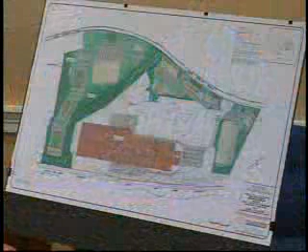The green shaded area submitted on the master plan with the application depicts an area of 45.5 acres of land. Of that land area, 37.5 acres consists of acceptable land, and the requirement to satisfy the density is 36.7. So we exceed the area requirement based on that green shaded area by just under an acre.

Just to explain what that represented, it was depicted in, I think, the last note of the plan as well. Chad, hang on one second, I think we may have a question for you. Just curious, what green shaded area are you talking about? The entire green shaded on that? Not this map? Your plan has got a different green shaded area. It does? Yeah.

In the maps that were sent out to us, the green shaded area is the area they wish to count as providing the acreage for the residential, to support the residential. It would be that shaded area. Including the big box space and all that? It does not include the building area or the parking area for any of the retail space, but it does go around it, as you can see there's a white line around it.

It's my understanding that there were a number of meetings with staff in the past. Some of that staff has moved on, but there was an understanding that the density for the residential development can somewhat sprawl through the site. So we are getting relatively close to some of the retail space in order to satisfy that density requirement.

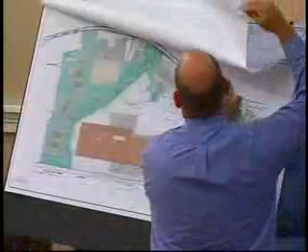The buffer area will also be incorporated into a proposed open space area as depicted on the master plan. If I may, I'm just going to flip the page back to the first sheet. Yes, please. Thank you, Mr. Chairman. The reason why I wanted to flip back to this first sheet is because the open space was not shown on the plan that was submitted with the application, and has since been added to the plan.

So the buffer area will be incorporated into a proposed open space area, which is depicted on the plan. The open space area will extend all along the southern boundary, wrap around the residential, encompass the stream that runs through the property, as well as the wetland and wetland buffers, extend up into the retail area, and ultimately come out towards Daniel Webster Highway and capture the two ponds, the former fish hatchery. That total area consists of approximately 22.5 acres.

As part of this development, this area will be enhanced to include seating and walkways. There will be an internal trail or walkway network connecting all components of the development, so you'll be able to leave the residential project, come into the retail, cross through the open space area, and get to the other facets of the project.

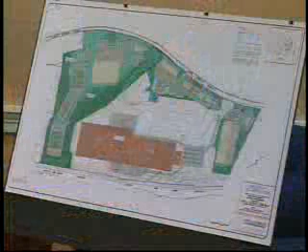If you take a look at the layout, if we started striking a line between these two buildings there, we wouldn't meet the technical 20-foot setback requirements between the property line and the building. And as such, in some areas, we may not meet some of the buffering requirements, although the buffering between like uses is pretty minimal.

In discussing this with town staff, it was our understanding that this could be waived or relief could be granted from the planning board as part of the conditional use process, so we would like to request that at this time.

And then in regards to the project phasing, it is difficult to project exactly how this project will be developed, because so many aspects of it will be market-driven. Currently, the residential portion will be Phase 1. It'll ultimately be constructed by the John J. Flatley Company. The remaining pad sites will be actively marketed and developed as users come in and sign on.

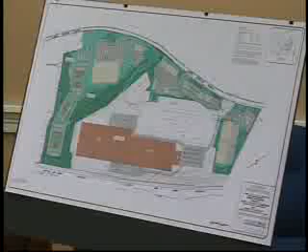With that said, the Flatley Company does have a lot of development going on in Nashua currently, and if they project or see an interest, a lot of times they will go forward and build, let's say, a portion of the retail development, and then sometimes you've got to have the product in order to get the users, and so there will be some discussion and ultimately some decisions made potentially on what the next step will be, but I'm sure it will be a function of what the response is once this property is marketed.

And as I stated earlier, we would like, if at all possible, there to be no restrictions on the residential portion of this project, mainly due to the fact that there is a large amount of development that's moving forward currently on this project, and that being mainly the FW Webb development.

So at this point, I'd be happy to try to answer any questions that the board may have, or I can go into the conditional use items and just read those items into the record. Let's see what we have for questions from members of the board. Does anybody have questions or comments? Yep, Desiree.

I have a few questions here that I made note of. Can you talk a little bit about the FW Webb? Is it going to be distribution or manufacturing? What kind of services are they going to be providing when you bring that through?

My understanding is it's going to be a distribution facility, mainly warehousing and distribution. Just Kevin Walk from John J. Flatley Company for the record. Yeah, Chad has that pretty much down. It is mainly going to be a distribution center.

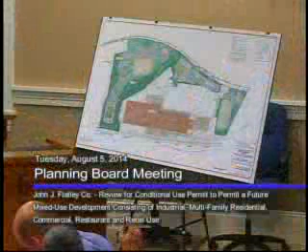Let's show that for you for a second. Is that working? Oh, there it is. Yeah, there's a path that comes through here, and it actually loops around, and it goes to the house, which is right here.

Once this FW Webb parcel is conveyed, which we are still under the assumption that it is - things seem to be moving along quite well with them - there's a chunk of that path we'll probably discuss about whether we keep it and turn it into a walking path, or if we rip it up and put lawn down and relocate a walkway in that area.

So that property hasn't been conveyed. Why the leg that goes up and sort of dead-ends there? What's the purpose of that? This area here - yeah, that's an excellent question.

Initially, that leg did not exist. But in the process of designing the FW Webb site, they found they needed more area to address their drainage requirements. Ultimately, to the south there are slopes they'd have to contend with, and they're within the shoreline protection setbacks in that area as well. So the only place they could really address stormwater for the southern portion of the site was up in this area.

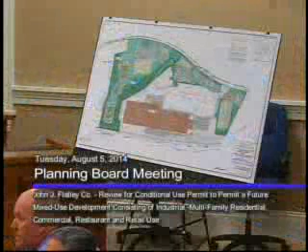Can people walk from one side of the pond to the other? Yes. And if so, where's the bridge crossing? There is no bridge. Currently the outfall from the pond goes subgrade and daylights here, and this is where the brook starts—it's an existing underground pipe from the pond to the river. You can drive over it now, you can walk over it, you wouldn't even know it was there. So the path will cross on that? Exactly, right.

I personally would be looking for some pedestrian uses on this site to blend in. I don't know if you've got a sidewalk along Route 3 or not—couldn't tell from the plan. Looked like maybe, but it's not clear.

But at any rate, I would like to see pedestrian accessibility from the residential to the commercial. That's the idea of tying all of this together and making a planned unit development of this kind—to keep all of these services together and make them walkable and easier to get to without impacting traffic.

To that end, I wonder why the restaurant is parked at the very far end, as far away from the residences as you can get it. And there seems to be no access to the existing restaurant, which is right there on the corner of your property, which might attract some pedestrians. So I would like to see pedestrian connections to those things, and I'd rather see the restaurant moved, to be honest.

I think at the very least, next meeting we'll come in with at least a walkway there. And we've talked about what you just spoke about with the restaurant also, maybe having it a little more centralized—that would make it a little more attractive to people. It's bizarre to have it on the other side of the industrial; you'd have to walk through the industrial to get to the restaurant, and a distance at that.

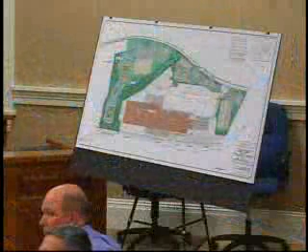And the one other question I had to do with the architecture. You said there was no common architecture right now, and I wondered if you had any particular objections to some form of common architecture. I don't mean they all gotta look exactly alike, but some theme that carries through that ties this development together architecturally, a similar type of architecture between the residential and the retail and the restaurant and all of that. I don't think it's anything we're opposed to. It's just it might be one of those things, I don't know if you can see it.

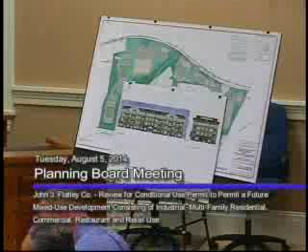This is a rendering of the apartments, the 4-story apartments that have been constructed or are under construction in Nashua, so they're gonna be very similar to that. Colors may be a little different, that type of thing. My point is, when we get into the retail portions of this and we strike a deal with a retail carrier, whoever it might be, they may have their own type of color schemes or signage. My fear of just outright agreeing to something like that at this point is, I think it's our wish as well as your wish to see this developed fully, which we'd all like to see. I'd hate to see somebody back out because they don't want to match colors, I guess is really my point.

We could definitely suggest it to them. Ask 'em overall, I mean it's a discussion we should have here tonight, but we should also think about it in terms of the whole project, because the concept of a CUP is that it's master planned. Master planned means you thought about all the pieces as they'd come together. And I understand you don't know who all the tenants are going to be, and I don't necessarily want to put us in a position where we're turning away developments because of architectural standards. But on the other side of the coin, I don't know that a red and white TGI Fridays on the corner necessarily fits in with any part of a master plan.

I agree. And we'd be telling TGI Fridays, I appreciate your thematic design for your building, but you gotta make it fit in with the neighborhood. It's definitely been done other places, you see Dunkin' Donuts changing their facade in different cities and towns and so on. I guess you're saying there'd be some sort of groundwork laid for the type of either architecture or color scheme. To some degree. I don't know that the board sort of lays that out, but within the concept of something that's master planned, they ought to look like they all belong together, that somebody thought about these things together.

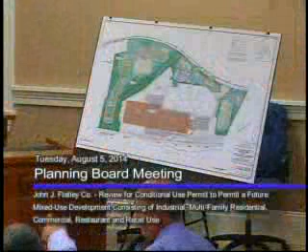So as it comes down the north side, which is the right-hand side of the apartments, there's a road that basically goes all the way through. That's something they requested, and it also loops around and goes around the other side of the buildings.

There was also discussion that if there's a connection that doesn't necessarily need to be made for through traffic, can we shrink that down to maybe 14 feet wide instead of 24 feet wide, strictly for emergency access? To provide a little bit more tree space or grass space, but also giving emergency vehicles enough access to get to where they need to get going.

I think when all is said and done with all of this, we're going to see multiple paths to get in there, because currently right now, where the sewer line comes through the property, which would be the bottom right-hand corner of the big box, it runs down into the apartment area. That's currently drivable.

And emergency access can be achieved through that route currently. That's been discussed with the fire department.

The last thing we discussed with the fire department is coming off the back end of the apartment area to get down to the railroad. Apparently they've had some issues accessing the railroad in different areas, and there's been brush fires due to the train going by or that type of thing. So we'll also be providing access for the fire department at the back end of the apartments to give them access to the railway system.

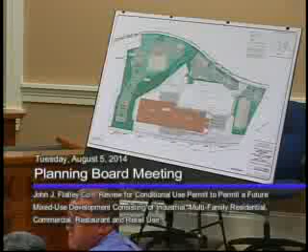Because I can tell you with the big box, I wouldn't want to see a big parking field in front of the building. I'd tell you you've got to do something more creative with that parking, whether it surrounds the building or it's broken up with islands or green spaces. What looks like 3 acres of parking in front of a 3-acre building, in the site plan I'd want to see that come forward.

No, I think I agree with you 100%. This was shown to show that this will work, that we have enough parking spaces. It's almost like a yield plan to me. Yeah, but I am in agreement that when we get into specific site plans, things will be more detailed.

But we'll take into account everything that's been mentioned here. The low-impact design is something, especially on a site like this, I've been discussing for over a year. The soils out there are great for a low-impact design. If we can get all the numbers to work out, that would be my personal preference, to do an LID. It's really just about custom made for it. We're in a watershed protection area, we're in a wellhead protection area. That's all been discussed with department heads at previous meetings with town departments. That said, I think that would still work.

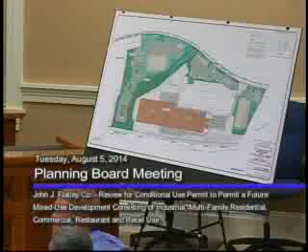I can offer you my own thoughts on the sidewalk. I don't mind seeing the internal sidewalk. We've just got to somehow cross the bridge of making that sidewalk, which is internal to your site, a public way—meaning the whole town can use it, not just the people who live here or want to shop here. If they want to just get from the Homestead Restaurant to the bowling alley, they're going to use your sidewalks, so there needs to be some reasonable way to get from one end to the other.

There's a quick comment. Thinking about that, going back to making this a destination point—think about, if there's an attractive feature, sometimes they'll use a historic element for the space. Think about people being able to go to a center point. If that pond can be turned into something more ornamental with lights, that would bring people down there to enjoy their ice cream after whatever shopping. Maybe that ties into this public space we're talking about—maybe it's a small park, a pocket park or something.

When you said that, Bob, that's what kind of hit me and tied everything together. I think that's a good element. I think you could also consider, with the small retail between the restaurant and the big box, consolidating that parking into one area and making that more of a walking effort to get from shop to shop, with architecture and pocket park type features, benches and things, and not necessarily cozy parking right up to the front door of every building, so that people go car to car. That's cool.

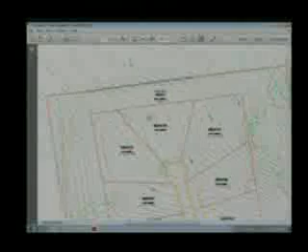If you take a look at our cover sheet, you'll see the property surrounding it is substantial and undeveloped, under the conservation easement. The island property, correct.

Are there other comments or questions by members of the board? So, Ken, when you're talking about the easement, the building envelope would be protected, but would that also prevent, say, something like a shed going in the back? Is that what you're talking about?

Absolutely, nothing could go in that easement. That's right, it's open space, and it's subject to this very same easement language and conditions that a singular lot of open space would be as well. The easement wouldn't be a separate easement, it would cover all of that land, in fee ownership as well as the overlapping easement to the private property.

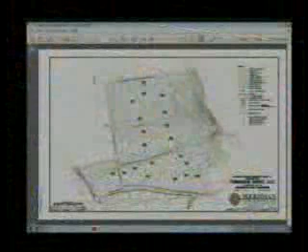Okay, Desiree? Just with regards to refreshing my memory on the open space requirement, the landscaping that would be required there—because that overlaps—is it natural landscaping that's going to stay there, or what would you say? The landscape requirement comes in, if I understand the question, at the 100-foot mark.

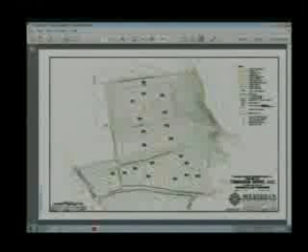We had a property that we did a subdivision on not too long ago off of Pearson Road, and we talked about certain reductions to that landscape buffer. In this case, this landscape buffer, the 100-foot, is entirely within the open space, so there'd be no disturbance whatsoever to it. So if we then provided additional buffer beyond that limit, that would be subject to the no-cut as well.

So if there were an easement strip here, say back at lot 7, this would also have a no-cut requirement. It's part of the open space, it's not to be disturbed, it's for wildlife and recreation purposes perhaps. In terms of clarification for the buffer, it would be accomplished by a no-cut, leaving the natural woodland there, not plantings. No, we're not requiring you to plant anything either.

In terms of what Mike was asking about, outbuildings and sheds and things like that, I guess this is the same regardless of whether you put an easement on the back. But backing up to conservation land, I don't know who would know if you put the shed 20 feet into the town's property. I don't know how you make that enforceable. I know it doesn't really change based on what you're proposing today, because that's always the case with open space. It ended up being the case at the outlet mall, where all of those properties had their sheds built on the outlet mall's property.

Yeah, well, as a requirement of the lot itself, lot monumentation, I can say that these aren't terribly far—this lot 7 as currently configured is roughly about 150 feet wide.